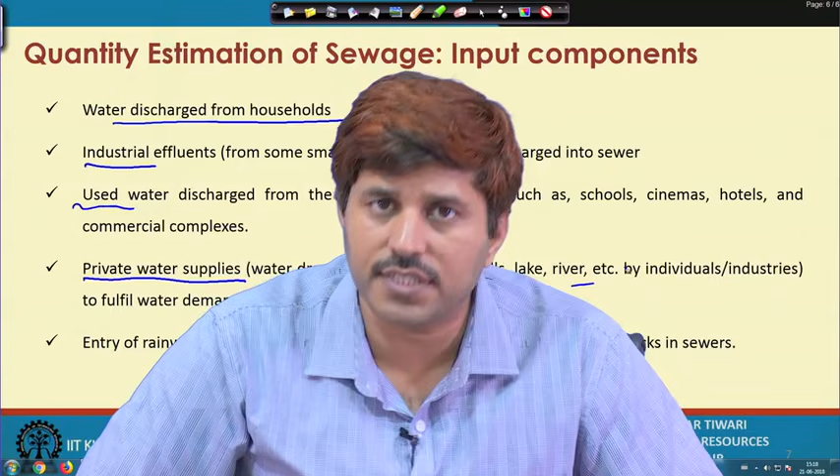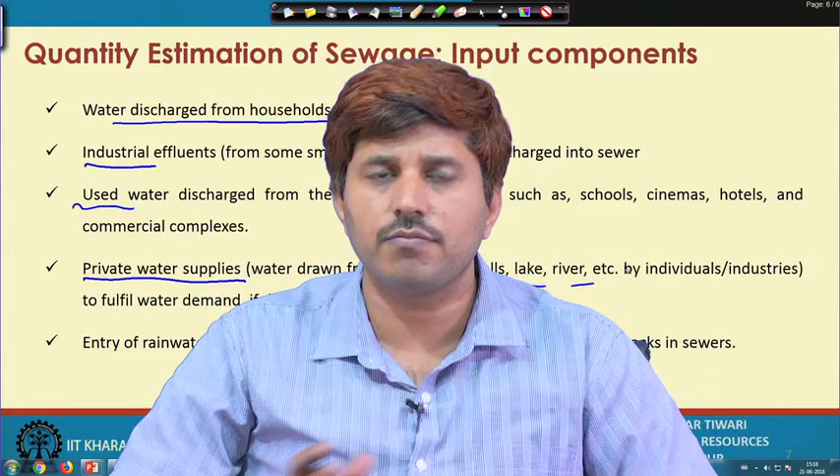This is one of the very practical problems, and I am sure most of you have seen that many individuals and households have their own private water arrangements, in the form of wells, tube wells, hand pumps, submersible borings. Some small colonies or slum areas also withdraw a lot of water from lakes and rivers to meet their water demands.

Such water is also typically discharged to the sewer line, making it one of the components of the sewage. Although it is difficult to estimate this, the amount of water generated from households based on supplies can be estimated, since people have an idea how much water is being supplied, which can also be metered.

Water from recreational areas or public places is also fairly easy to estimate. For industries, if legally permitted, the municipalities or water works have an idea of how much industrial effluent is coming into the sewer line, so that can also be quantified to some scale, particularly if it is legalized.

However, this is very difficult owing to private water supplies—who is using it, how much is being used—since it is their own resource. So it becomes very difficult to precisely estimate how much will be consumed there.

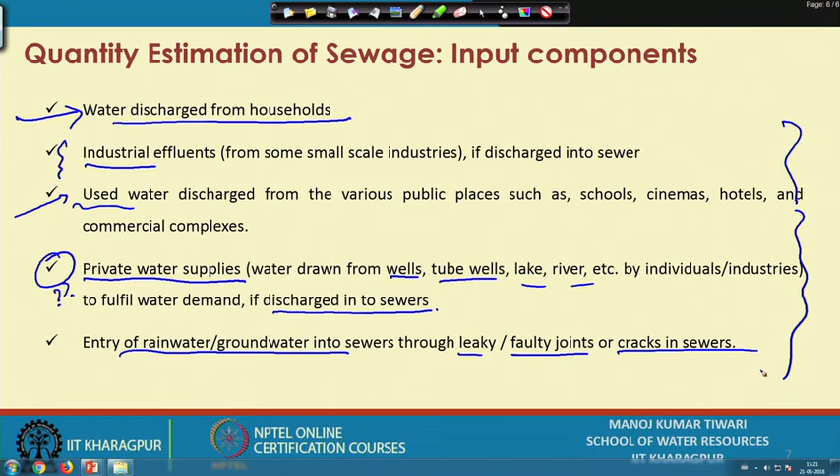These are the major constituents or components which come into the sewer line, apart from storm water runoff if it is a combined system. In a combined system, storm water runoff will also come in, and by volume that is the highest quantity. However, if we exclude that and talk about the separate sewer line system, these are likely to be the components coming in as input into the sewer lines.

Now, if we talk about the quantity estimation of the sewage, there are various steps that need to be taken. How are we going to estimate the quantity? For this purpose, first and foremost we need to fix the design period.

For estimation of the quantity at any given point of time, we do not need the design period, but the idea of including it is that generally when we estimate the quantity of sewage, our objective is to design infrastructure, a sewerage network or sewer system. So if we intend to design a sewer network, we will be designing it for a design period, for a future age, and for that purpose we need to fix the design period.

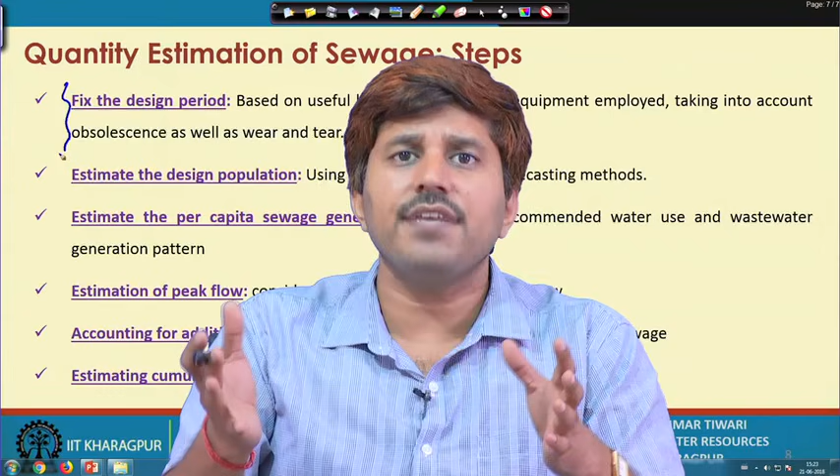So for the design of the sewerage system, the first step is to fix the design period of the sewer network. Design period means for how many years our system is going to work—that is, the expected life of the infrastructure or system that we are going to install is actually its design period.

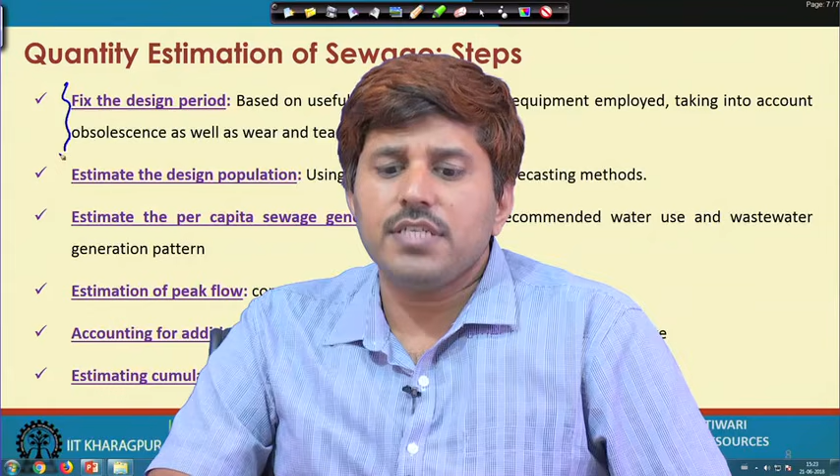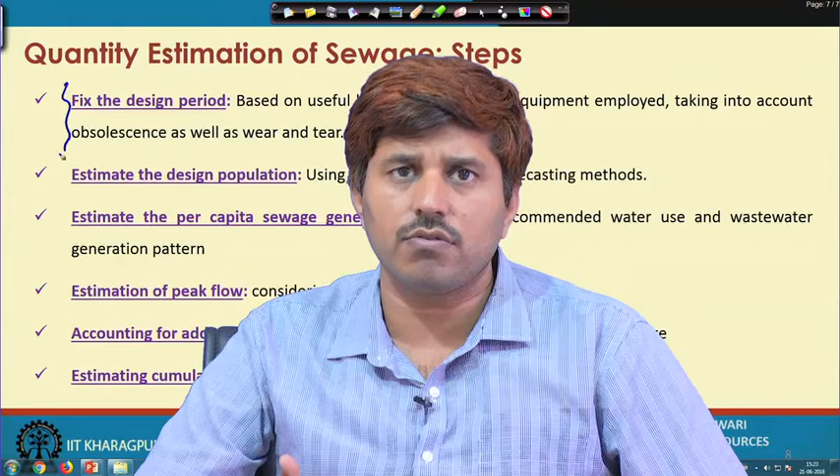For instance, if we want to estimate the quantity of sewage today, we do not need a design period.

Then for the estimation of sewage, we need the population. If it is for today, we can get the data from the census, a counted population. But if we are going to install a system that is going to work for, say, 30 or 25 years—if we install it in 2020 with an expected life period of 25 years—then we need to know the population up till 2045.

So for that we need to use standard population forecasting methods to get an idea of what the population is going to be at that point of time, because that becomes our design population based on the design period.

Thereafter, one should look for estimation of the per capita sewage generation. This is based on the recommended water use and wastewater generation patterns. Our manual suggests certain values or approaches that can be adopted for estimating the per capita water consumption or per capita water demand and per capita sewage generation.

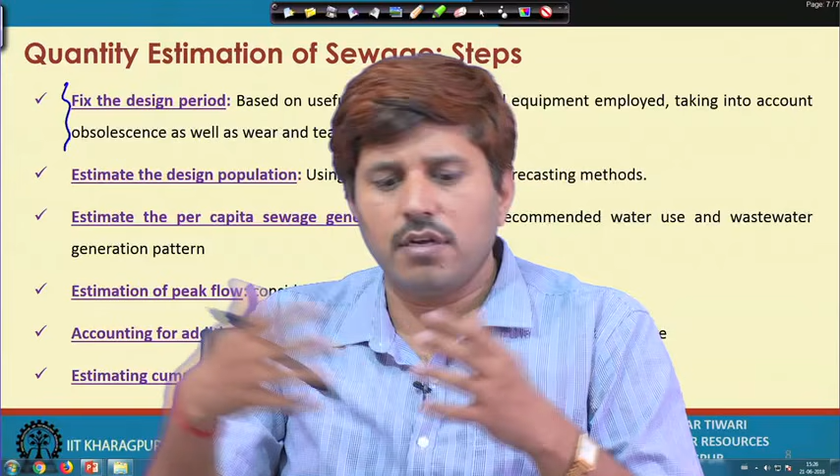Then for the purpose of design, if we go for design of a network, we need to estimate the peak flow as well. As we were discussing, there is fluctuation in the dry weather flow. So we need to consider those fluctuations and estimate what is going to be the peak flow, because our system should be able to cater to the sewage transport during the peak flow season. When the highest amount of sewage is being released, our system should be able to transport and carry that sewage, otherwise there will be overflow and significant failures to the system.

Then after these important steps, there has to be accounting for additional flows and inflows, from sources other than domestic sewage. As discussed in the previous slide, there could be private water supplies, industrial flows, and some commercial residential flow. So whatsoever additional flow or error should be considered. At times, if there are losses or some water is not being used, there might be some subtraction also.

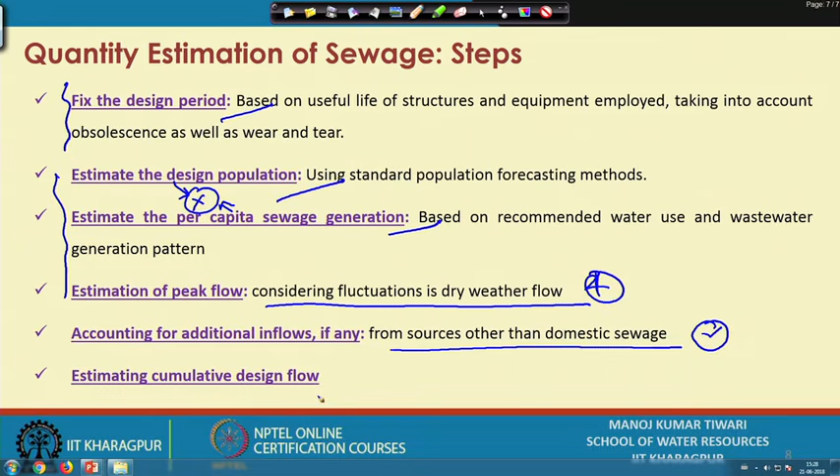That needs to be considered, and then we can have a cumulative estimate of the total design flow of the sewage. Because once we know the design period, the design population, and the per capita sewage generation, we can get an estimate of sewage by multiplying design population with per capita sewage, giving us an idea of sewage being produced. We can apply peaking factors, which we'll discuss later, to get an idea of the peak value of the flow. Then we need to consider any additional inflows or losses which are not reaching - not only inflows but also losses. So we add or subtract based on what kind of flows are there, and estimate the cumulative design flow by considering all these independent components of the sewage.

Now, how do we fix the design period? As the design period, the CPHEEO manual recommends the period for various sewerage components. It is not necessary that our entire sewage network will have the same design period, because there are a variety of components installed - structural work with different lifetimes, pumping work with different lifetimes, pipelines, machinery, and sewage treatment plants. So they may have different life periods, and accordingly the manual has given this idea of design period in years from the base year.

Land acquisition typically could last for 30 or higher years. Conventional sewers typically have a 30 year design period, non-conventional sewers have 15 years. Pumping mains 15 years, pumping stations or civil work will obviously have higher lifetime since they're civil structures, so they can be designed for 30 years. The machineries, treatment plant mechanical equipment, and pumps can be considered for a 15 year period, and then subsequently could be augmented to meet the total design period if it is higher.

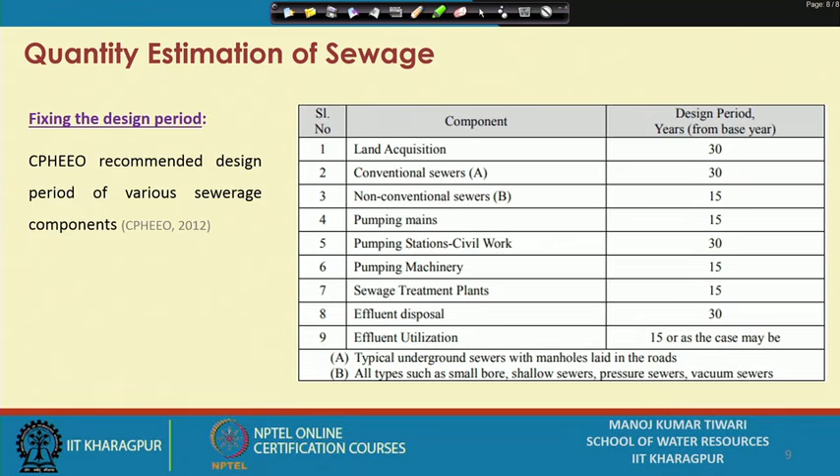The disposal systems again are largely based on civil work, so that can also be for a 30 year design period, and the effluent utilization may be for 15 years or as the case may be - so that can even be for a lower period as well.

Now, after the design period, one needs to know the design population. There are a variety of methods to forecast the design population.

The population obviously depends on the birth rate, which causes an increase in the population, the rate at which the population is increasing typically. Then there is a death rate which causes a decrease in the population, when people die at a certain rate, say 1 or 2 people out of 1000 in a fixed amount of time. So we can get an idea of the death rate and the birth rate.

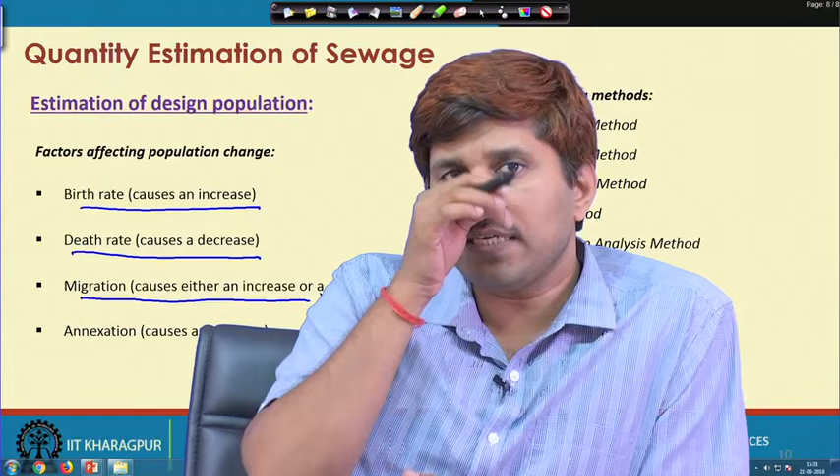Then there is a possibility of migration which can cause either increase or decrease. If people are migrating into the territory or area considered, its population is likely to increase, and if people are migrating out, its population is going to decrease. Generally when we plan a new city or town, and are planning a sewerage system or network, more and more people come into the city, so migration often gives an increase to the population. But if people are migrating out of the city or zone, there is a possibility of decrease in population.

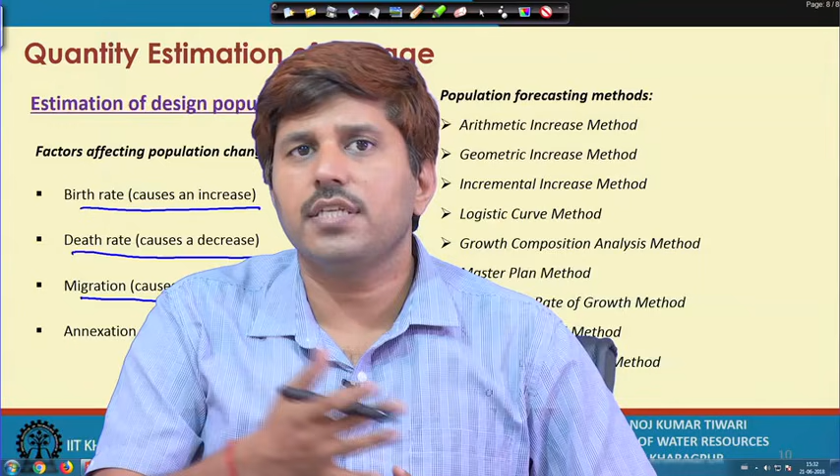Then there is annexation. Many times when the capacity of a city is almost about to exhaust, newer areas are added. This is very common - we saw that Bombay city got expanded, with lot many areas annexed to it. We have Navi Mumbai, similarly new towns in Kolkata.

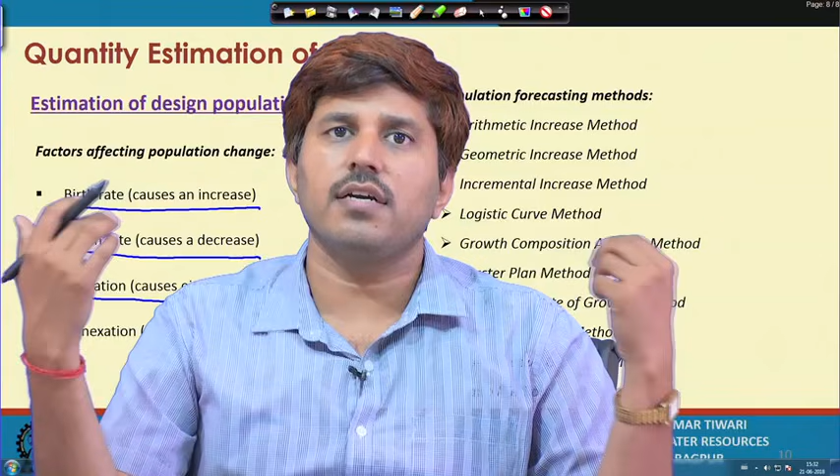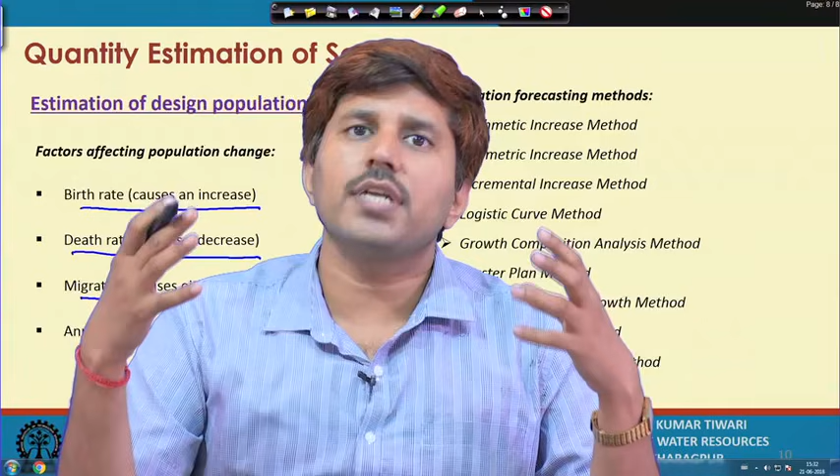In NCR we have annexed Gurgaon, Noida, Ghaziabad, and it is even likely to increase to Meerut. Take any major city example and you will see that lot of new areas are being annexed because the city is expanding. When a city expands, it acquires more areas, and when it acquires more areas, it acquires more population also. So overall this causes an increase in the population - that is another point, annexation.

So these are the major factors that affect population changes. Of course there are many other factors which could lead to any of these - job opportunities, health conditions, living conditions, facilities. If there are not proper health conditions, you will see higher death rates and people migrating out of that region. If you see a well-facilitated city, you will see lot many people coming in, migrating into there. So all these various sub-factors or smaller factors lead to any of these bigger factors.

For the purpose of forecasting population, there are a variety of methods - arithmetic increase method, geometric increase method, incremental increase method. These are some of the more popular methods, and then there are a variety of other methods including logistic growth or growth composition analysis method, decreasing rate of growth method, simple or comparative graphical method, ratio method, master plan method.

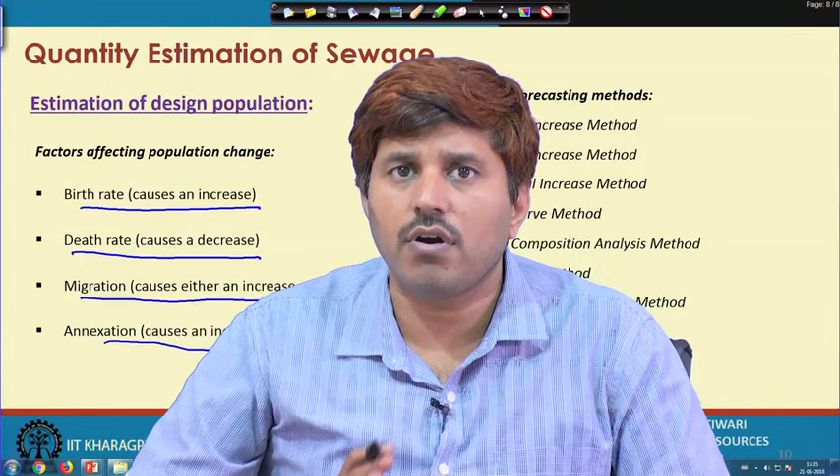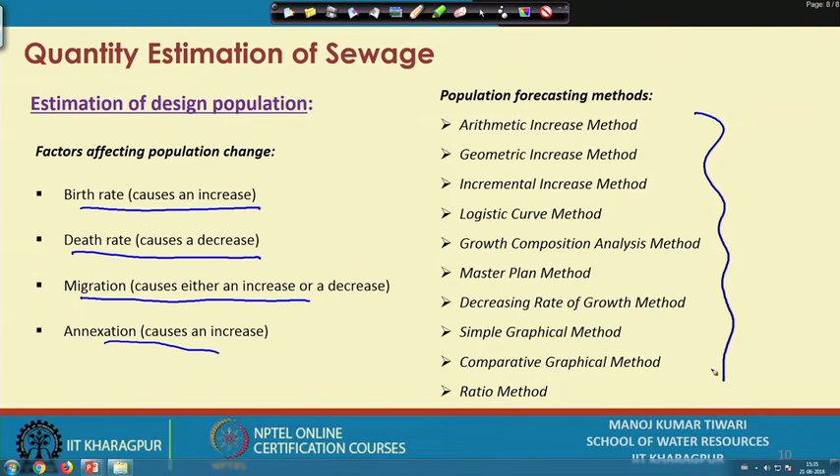These are the several methods which are typically used. We will be discussing these methods one by one in the next session. Thank you.